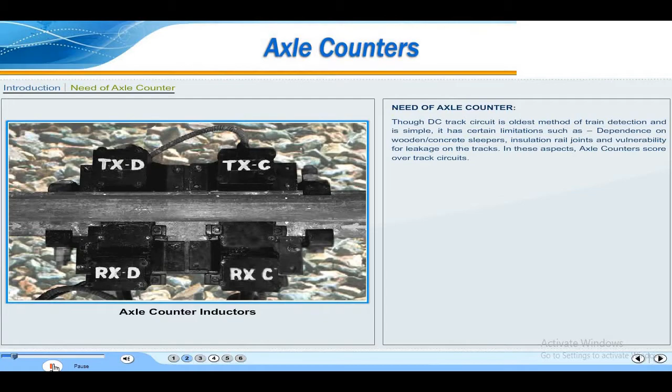Need of axle counter. Though DC track circuit is the oldest method of train detection and is simple, it has certain limitations such as dependence on wooden or concrete sleepers, insulation rail joints, and vulnerability for leakage on the tracks.

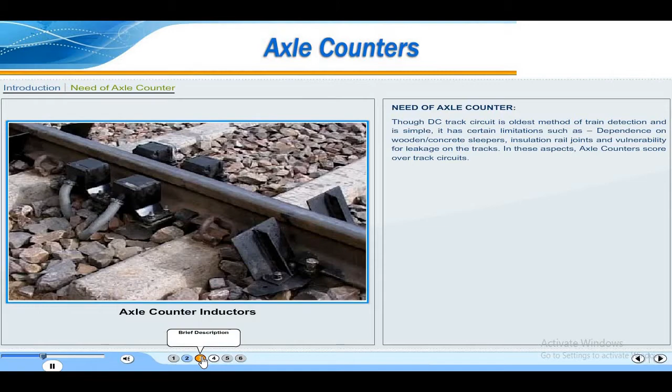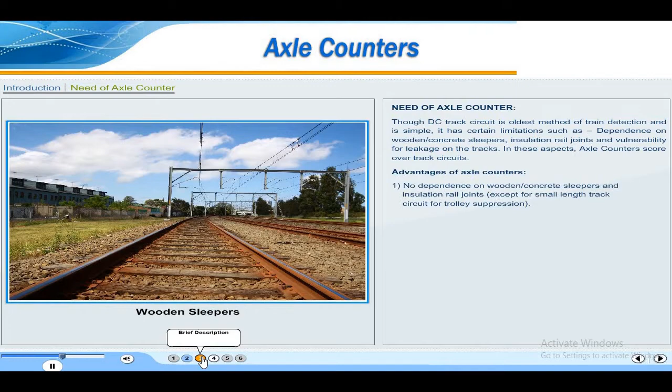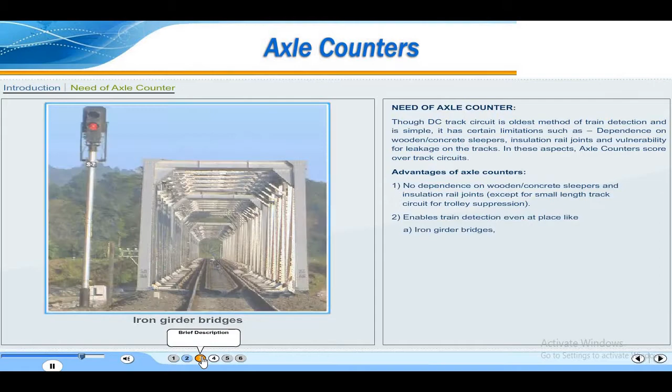In these aspects, axle counters score over track circuits. Advantages of axle counters: no dependence on wooden or concrete sleepers and insulation rail joints, except for small length track circuit for trolley suppression. They enable train detection even at places like iron girder bridges, tunnels, and tracks having leakage problems. One axle counter system can serve up to 20 kilometers long section.

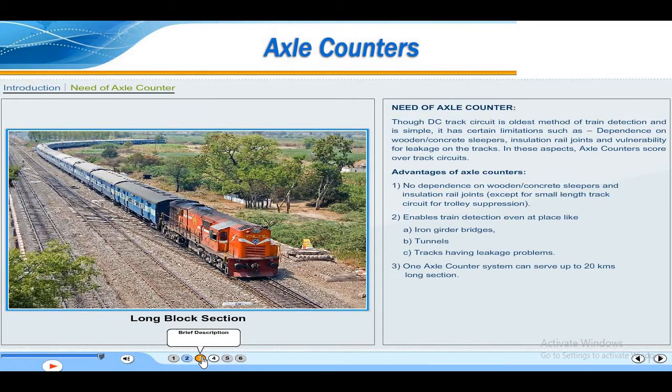Brief description: Axle counter is a method of train detection. It comprises an electronic system which senses and counts wheels passing at either end of a section of track under monitoring, and decides whether the said track section is clear or occupied. This decision is passed on to other signaling circuits in interlocking.

Axle counters shall conform to IRS specification S42 unless otherwise approved.

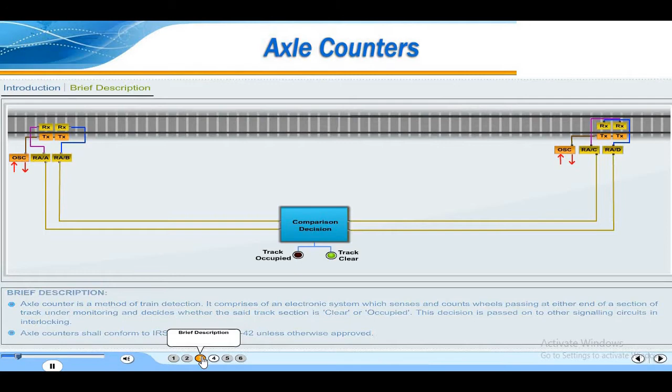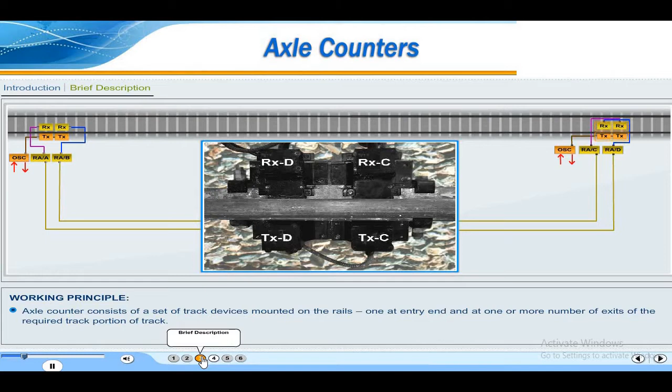Working principle: Axle counter consists of a set of track devices mounted on the rails, one at the entry end and at one or more exits of the required portion of track. This portion of track is known as the track section. The places of monitoring having track devices are known as detection points, DP or D.

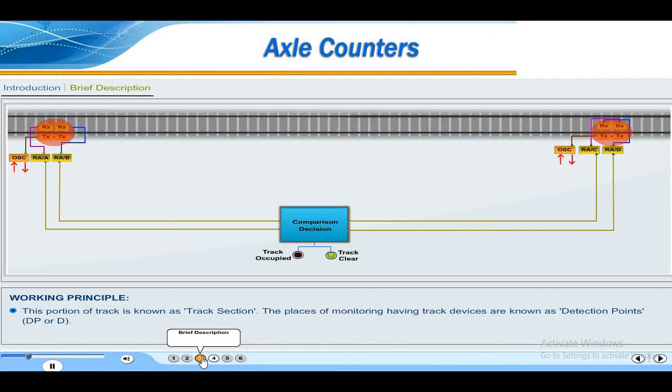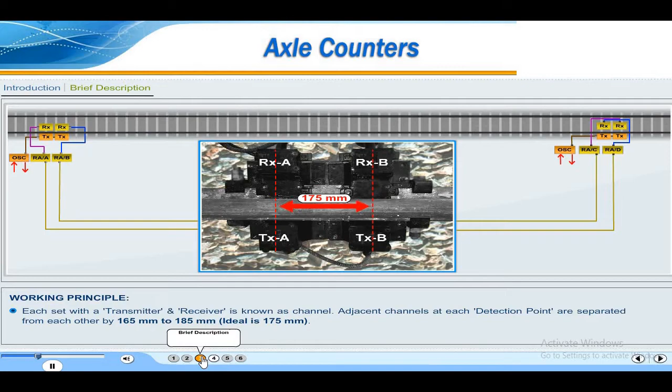To determine the direction of train movement, each detection point has two sets of transmitter and receiver coils. Each set with a transmitter and receiver is known as a channel. Adjacent channels at each detection point are separated from each other by 165 mm to 185 mm, with the ideal being 175 mm. A transmitter coil is fed with an alternating current which generates alternating electromagnetic flux, and the associated receiver coil gets induced EMF through flux linkages.

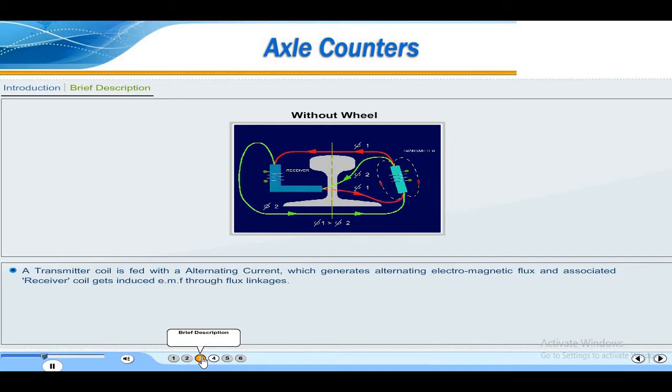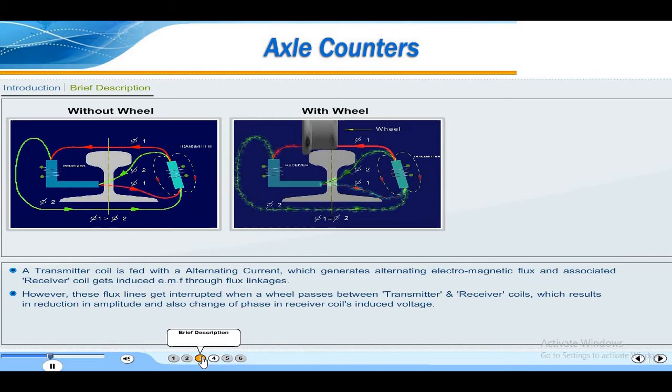However, these flux lines get interrupted when a wheel passes between the transmitter and receiver coils, which results in reduction in amplitude and also change of phase in the receiver coil's induced voltage. These changes in amplitude and phase in receiver voltages are used for wheel sensing and are processed by electronic circuits for counting and tallying, and deciding the status of the section.

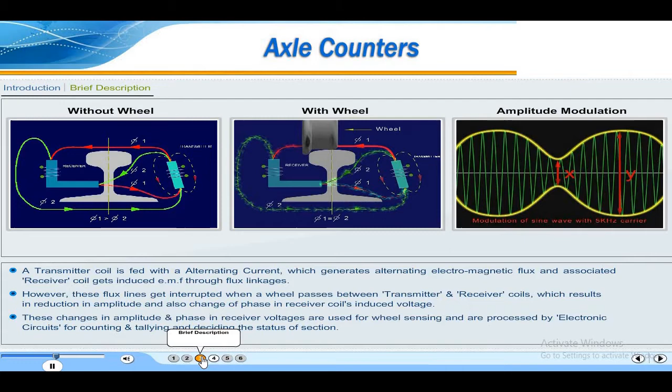Types of axle counters as per number of detection points: these are 1D, 2D, 3D and 4D. D stands for detection point. 1D has only one detection unit with two channels, 4 inductors.

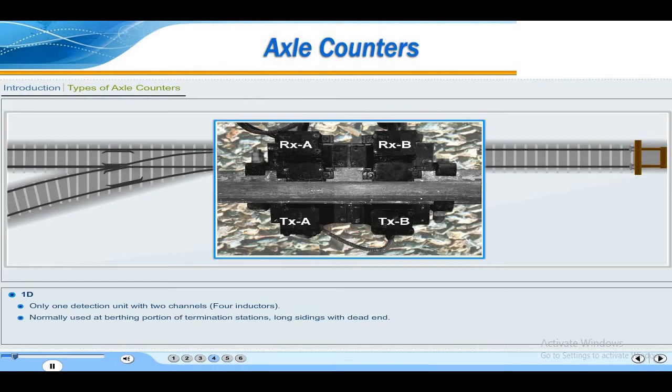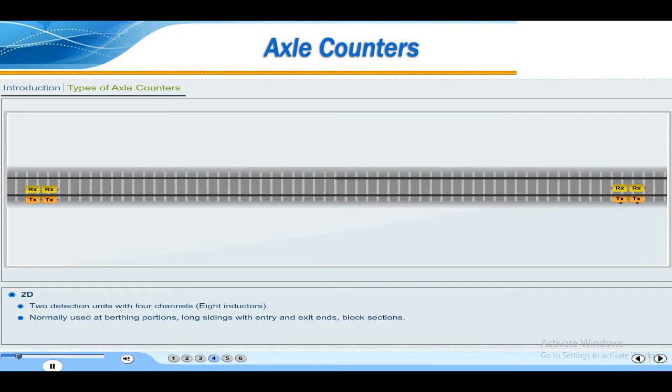1D is normally used at berthing portion of termination stations and long sidings with dead end. 2D has 2 detection units with 4 channels, 8 inductors, normally used at berthing portions, long sidings with entry and exit ends, and block sections.

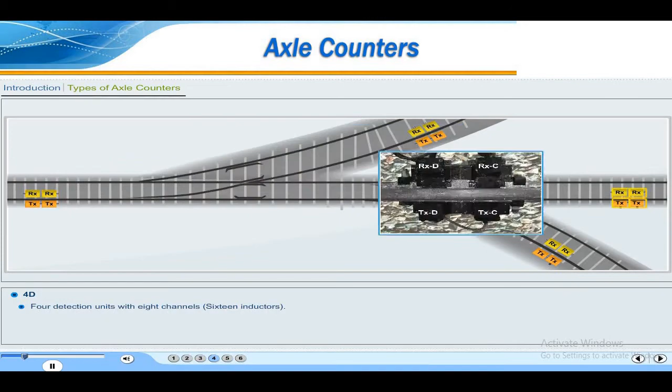3D has 3 detection units with 6 channels, 12 inductors, normally used at point zone area. 4D has 4 detection units with 8 channels, 16 inductors, normally used at more than one point and crossing area.

Axle counters are manufactured under 2 broad categories: analog axle counters and digital axle counters. Analog axle counters mainly employ electronic hardware for various functions, logics and communications. Typically, this type uses only one frequency of 5 kHz for both the transmitter coils of each detection point.

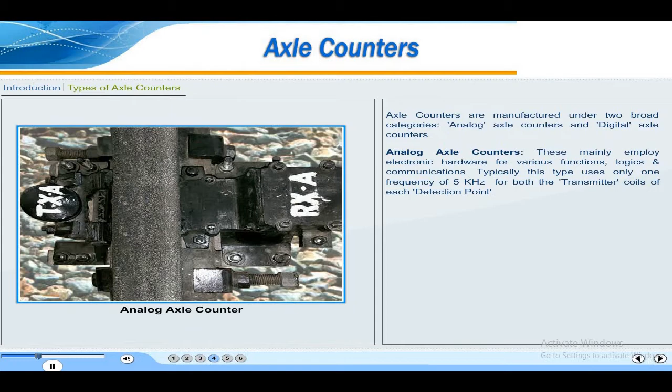Types of analog axle counters: Indian Railways introduced analog axle counters of SEL and Siemens makes in 1970. Based on SEL design, two variants of axle counters were developed. They are single entry or exit axle counters for straight portions, 2D type, developed by IIT Delhi in 1978.

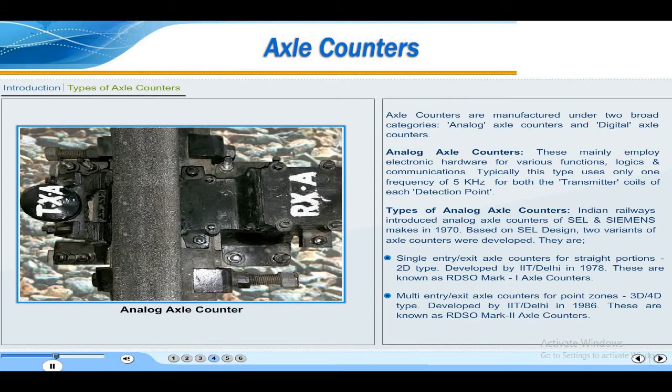These are known as RDSO Mark I axle counters. Multi-entry or exit axle counters for point zones, 3D or 4D type, were developed by IIT Delhi in 1986, known as RDSO Mark II axle counters.

Universal axle counters were developed by RDSO and IIT Delhi in 1996 as one model to serve 2D, 3D or 4D requirements with change in jumpering and number of cards. Among analog axle counters, universal axle counters are predominant in Indian Railways.

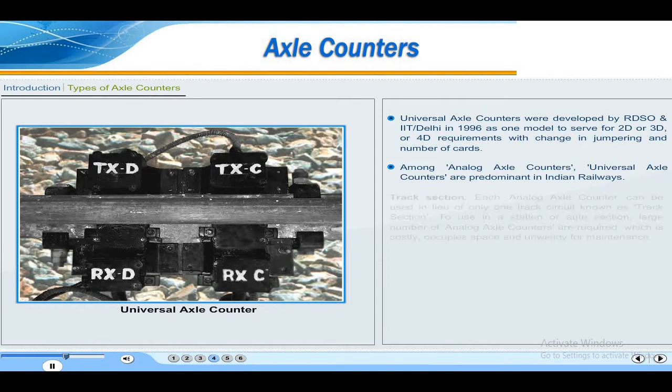Track section: each analog axle counter can be used in lieu of only one track circuit, known as the track section. To use in a station or auto section, a large number of analog axle counters are required, which is costly, occupies space, and is unwieldy for maintenance.

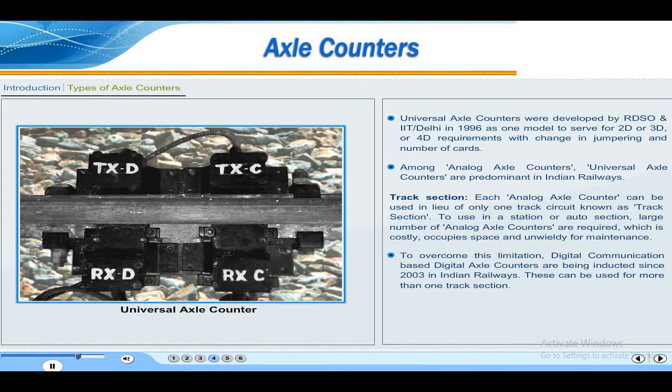To overcome this limitation, digital communication-based digital axle counters are being inducted since 2003 in Indian Railways. These can be used for more than one track section.

Digital axle counters are software-driven and microprocessor or microcontroller based. They use digital technology for signal processing, counting, and for communication from one to another. Typically, this type uses two separate frequencies of more than 20 kHz, one for each transmitter coil at each detection point.

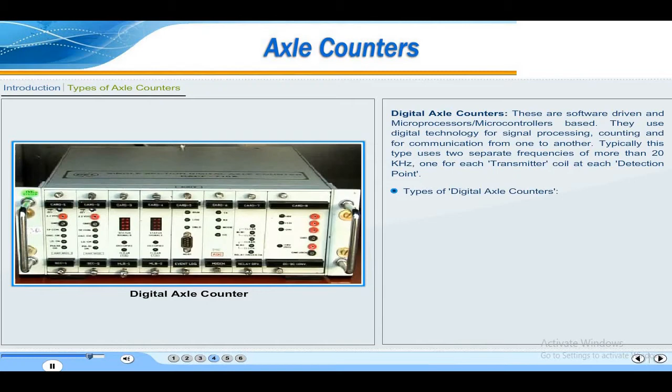Types of digital axle counters: as of February 2011, the following makes are in usage in Indian Railways. Single section digital axle counters, SSDAC: CEL, Alcatel, Eldyne, GG Tronics, General Electricals (GE).

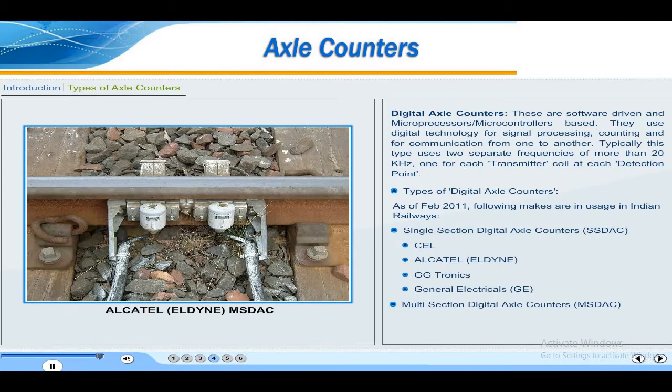Multi-section digital axle counters, MSDAC: Alcatel, Eldyne, Siemens.

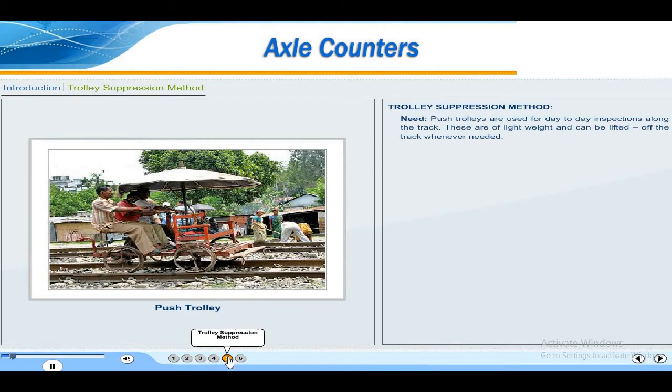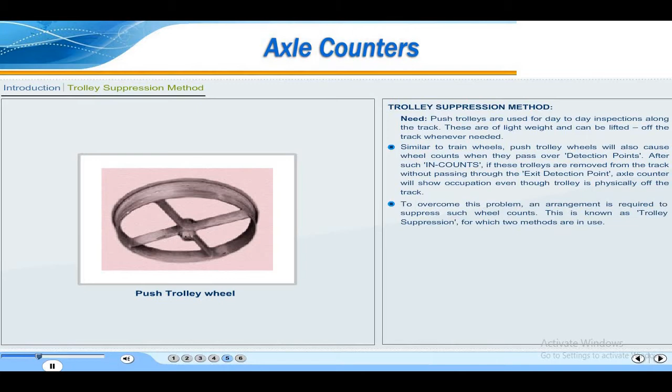Trolley suppression method. Push trolleys are used for day-to-day inspections along the track. These are lightweight and can be lifted off the track whenever needed. Similar to train wheels, push trolley wheels will also cause wheel counts when they pass over detection points. After such in-counts, if these trolleys are removed from the track without passing through the exit detection point, the axle counter will show occupation even though the trolley is physically off the track. To overcome this problem, an arrangement is required to suppress such wheel counts, known as trolley suppression, for which two methods are in use.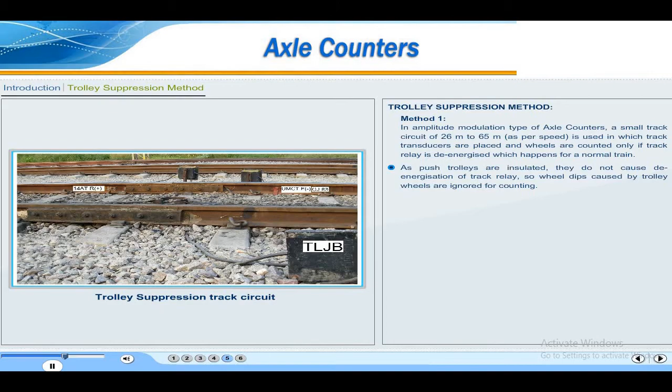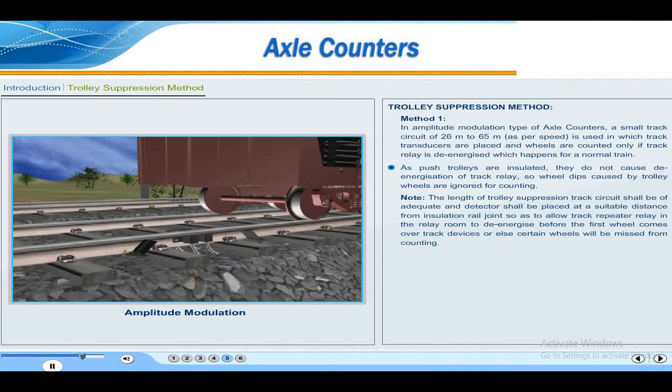Method 1. In amplitude modulation type axle counters, a small track circuit of 26 to 65 meters, as per speed, is used, in which track transducers are placed, and wheels are counted only if the track relay is de-energized, which happens for a normal train. As push trolleys are insulated, they do not cause de-energization of the track relay, so wheel dips caused by trolley wheels are ignored for counting. Note: the length of the trolley suppression track circuit shall be adequate, and the detector shall be placed at a suitable distance from the insulation rail joint.

so as to allow the track repeater relay in the relay room to de-energize before the first wheel comes over the track devices, or else certain wheels will be missed from counting. Method 2. As push trolley wheels are of smaller section, they generate less phase deviation compared to a normal train wheel. This difference is used to discriminate a trolley wheel from a normal train wheel. This method is adopted in digital axle counters of phase modulation type.

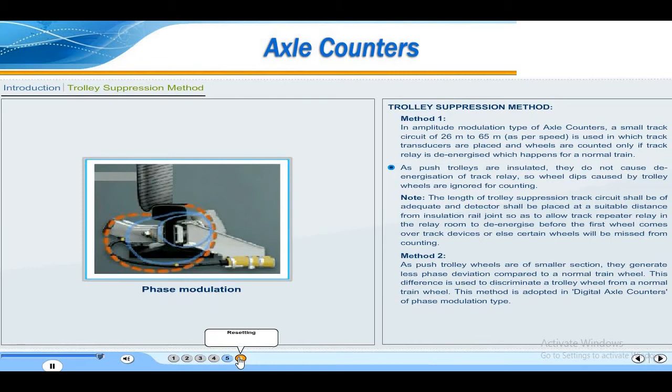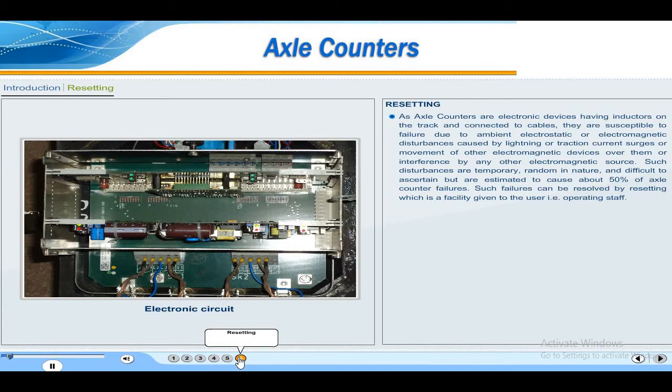Resetting. As axle counters are electronic devices having inductors on the track and connected to cables, they are susceptible to failure due to ambient electrostatic or electromagnetic disturbances caused by lightning, or traction current surges, or movement of other electromagnetic devices over them, or interference by any other electromagnetic source. Such disturbances are temporary, random in nature and difficult to ascertain, but are estimated to cause about 50% of axle counter failures. Such failures can be resolved by resetting, which is a facility given to the operating staff. Different types of resets are used as per need.

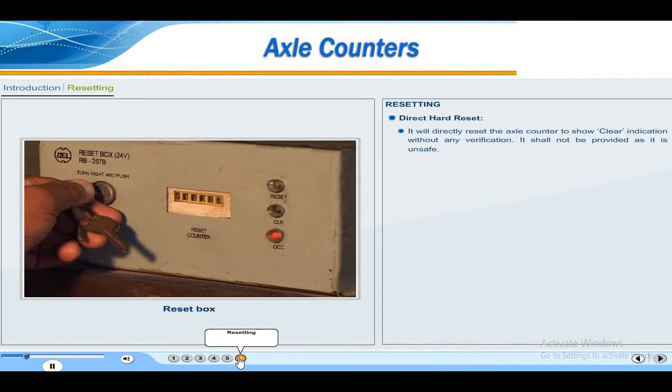Direct hard reset. It will directly reset the axle counter to show clear indication without any verification. It shall not be provided as it is unsafe.

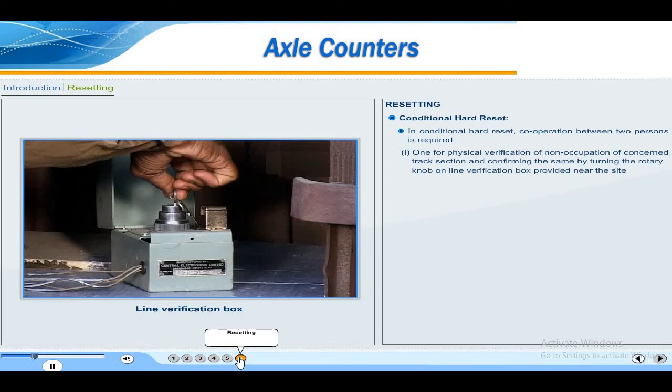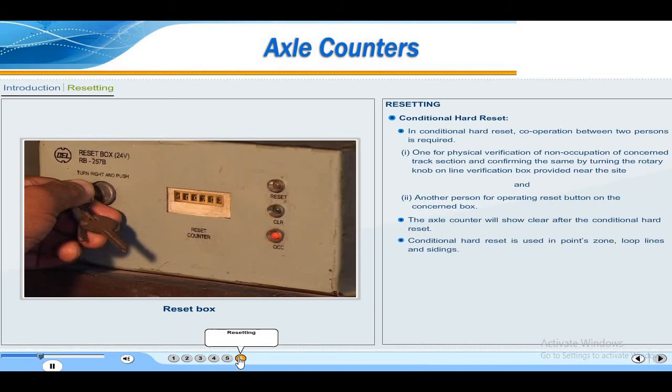Conditional hard reset. In conditional hard reset, cooperation between two persons is required: one for physical verification of non-occupation of the concerned track section, confirming the same by turning the rotary knob on the line verification box provided near the site, and another person for operating the reset button on the concerned box. The axle counter will show clear after the conditional hard reset. Conditional hard reset is used in points zone, loop lines and sidings.

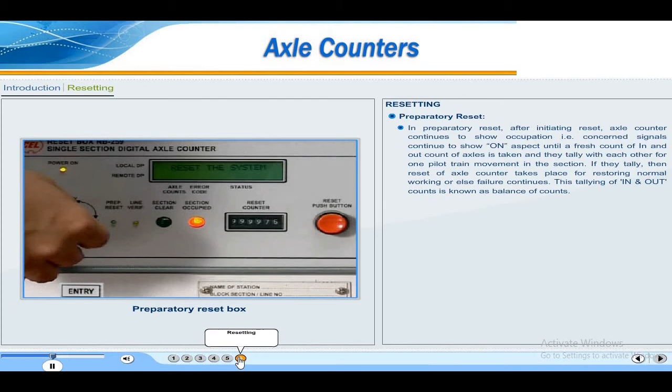Preparatory reset. In preparatory reset, after initiating reset, axle counters continue to show occupation, that is, concerned signals continue to show on aspect, until a fresh count of in and out count of axles is taken and they tally with each other for one pilot train movement in the section. If they tally, then reset of the axle counter takes place for restoring normal working, or else failure continues. This tallying of in and out counts is known as balance of counts.

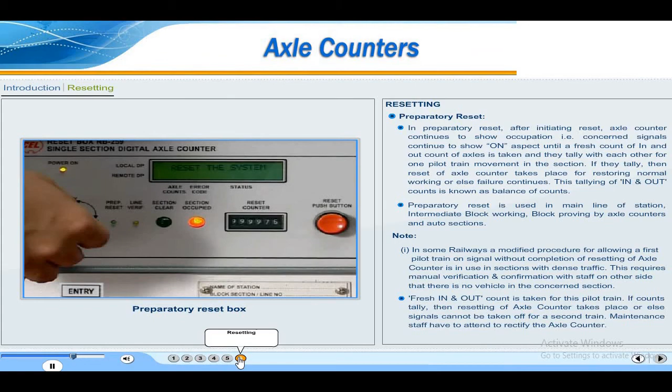Preparatory reset is used in the main line of a station, intermediate block working, block proving by axle counters, and auto sections. Note: in some railways, a modified procedure for allowing a first pilot train on signal without completion of resetting of axle counter is in use in sections with dense traffic. This requires manual verification and confirmation with staff on the other side that there is no vehicle in the concerned section. Fresh in and out count is taken for this pilot train. If counts tally, then resetting of the axle counter takes place, or else signals cannot be taken off for a second train. Maintenance staff have to attend to rectify the axle counter.

In auto sections, preparatory reset is applied only after ensuring that the entire auto section from one station to the next station is clear of trains. Preparatory reset with acknowledgement also exists, in which operating staff's fresh confirmation after count balance is required for resetting.

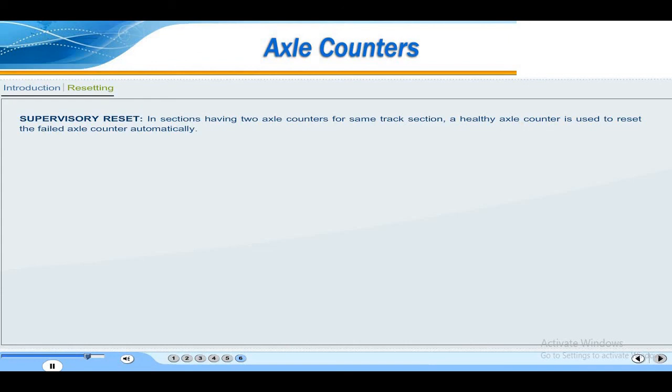Supervisory reset. In sections having two axle counters for the same track section, a healthy axle counter is used to reset the failed axle counter automatically. In auto sections using single section digital axle counters, one additional set of axle counters is used for exclusive use of auto resetting in conjunction with healthy track sections on either side of the failed section. In auto sections using multi-section digital axle counters, a supervisory track section is separately defined and used for exclusive use of auto resetting of the failed track section in conjunction with healthy track sections on either side of the failed section.